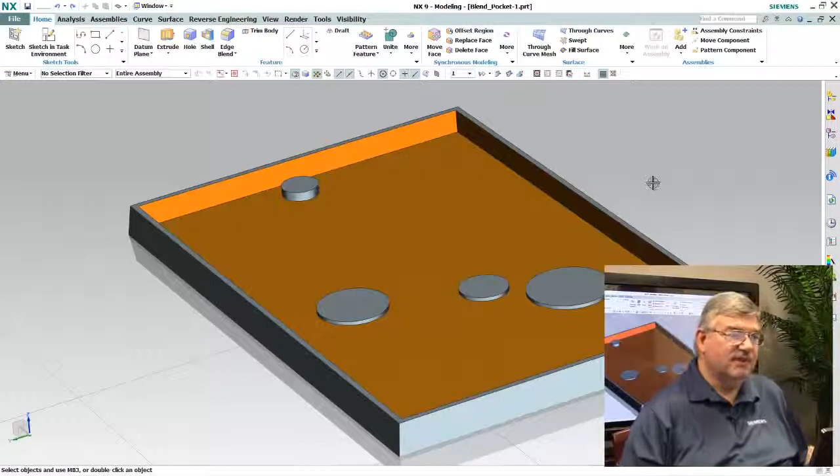Now in this particular case, what I have here is a part. Now I'm a designer, and I'd be perfectly happy if they manufactured this part just as you see it here. But of course this part's going to have to be machined. From looking at it, it looks like it's going to have to be machined out of a billet, which means that there's going to be a cutter that's going to have to remove the material, and unless you use a particular very expensive type of cutting operation, you're going to be leaving in essence blends around the edge of the pocket and around the various features here on the face of this.

The issue here though is that as a designer I may not really appreciate exactly what the results are going to look like based on the cutter. I can't maybe visualize that, and so if I start putting blends in here just willy-nilly, they may not actually represent what's going to be manufactured. So I'd really have to be kind of familiar with manufacturing. But there's a better way of doing it.

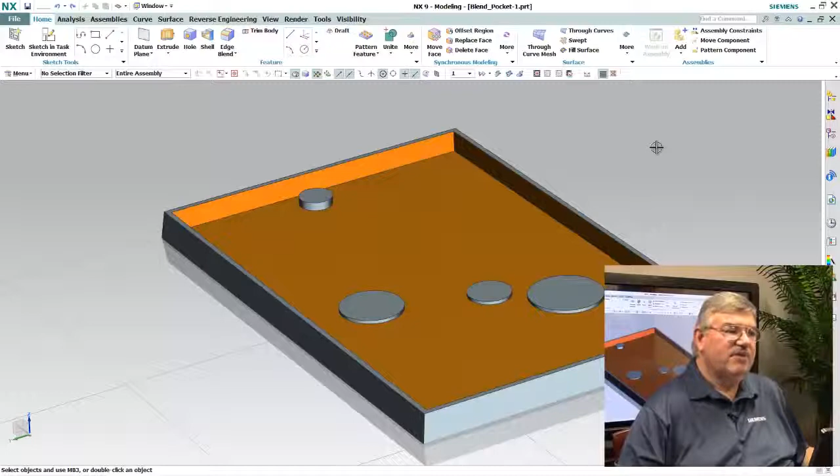What we've done is we've actually created a new function called a Blend Pocket, where we've taken that technology, the understanding, knowing how metal is removed, and based on the size of the cutter. So here I can define over here the type of mill. We have a couple of different options here where I can put in the size of the mill, so I may have to at least coordinate a little bit with the manufacturing engineer as to what the preferred tooling size is, and I can describe even the type of cut.

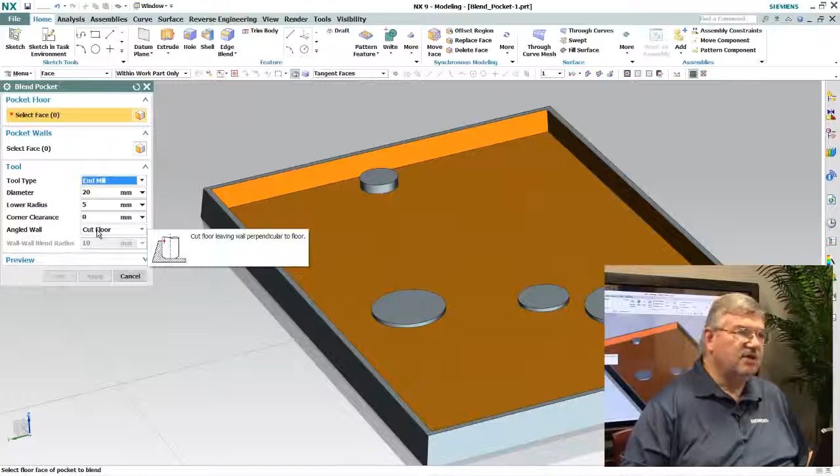And it shows here, there's little examples showing what that would look like. So now all I simply do is make one single pick, and you can see that all of the blends are created automatically. And this will really represent what the part would look like after being cut with a 20 millimeter diameter cutter with a 5 millimeter radius.

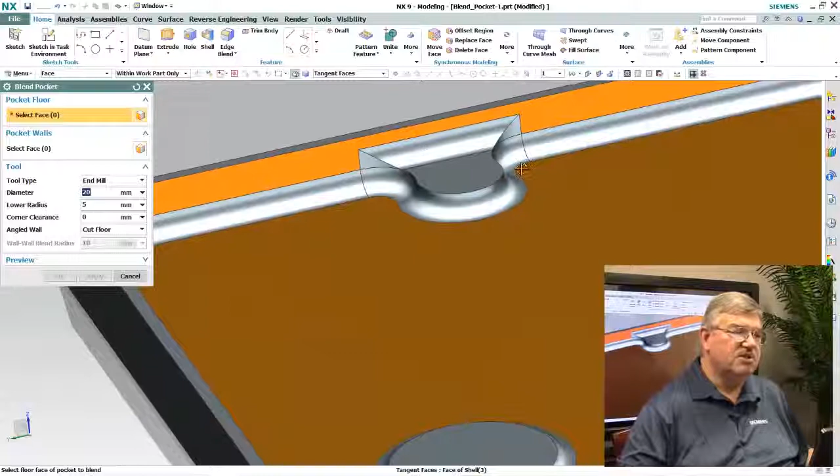And so as you can see, in order to machine around this little feature here, it had to machine up, over, and leave material behind. Obviously the cutter was too big to go between these features, so it had to follow this profile. So this material has actually been added to the model in order to represent what the real end part would look like. So the advantage that we see here is really several-fold.

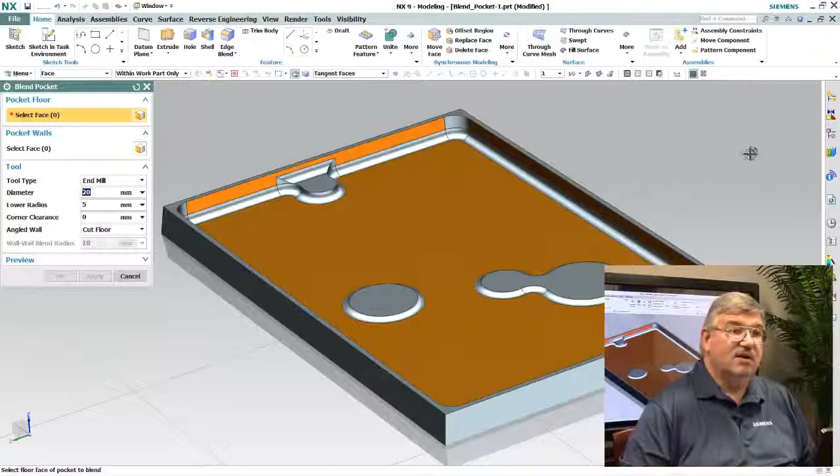One, it's very fast, so that I can completely blend this part in really only one selection, and it represents what it's actually going to take to manufacture it. So again, this is going to speed up the process. It's going to be more efficient. The manufacturing engineer, when he gets this part, all he has to do is just check to see what size cutter I used. In fact, he could make adjustments if need be. But the idea is this is a nice, quick, easy way to work.